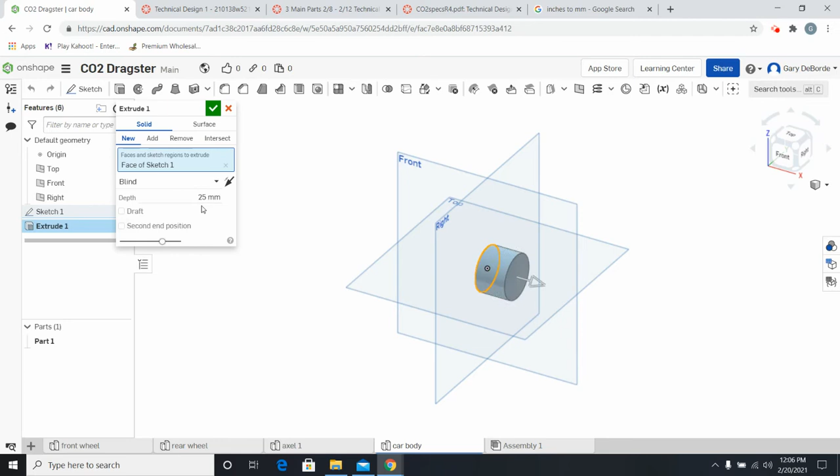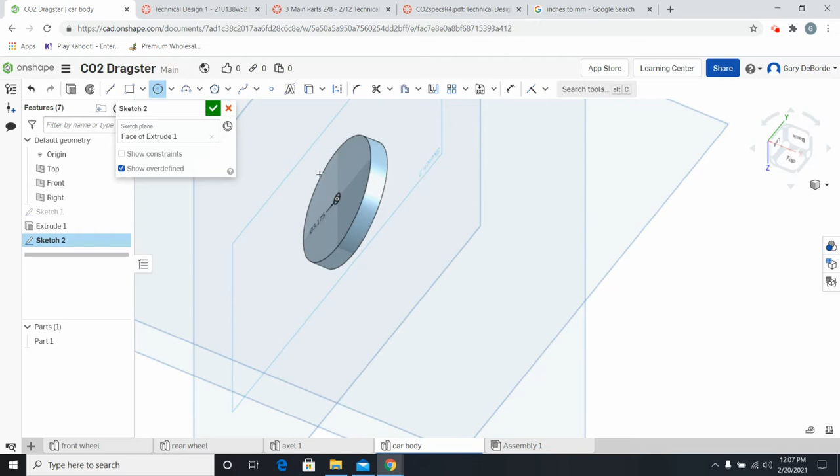Say okay to that. I am then going to select the surface of the wheel, and I'm going to select it on this other side, because I know it will be easier for me to connect to the car body that way later on. I'm going to make a new sketch, and I am going to place a circle in the very center of that, and I am going to make that 3.175 millimeters, which I know is the diameter of my axle because my axle is 1/8. I am going to say okay to that. And then I'm going to extrude this, say 3 millimeters, removing material into the hole and saying okay.

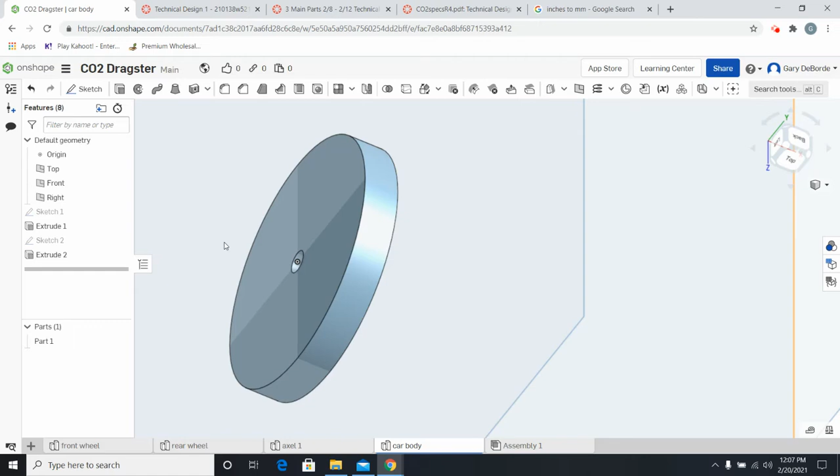Okay, this at this moment meets the specifications for the front wheel. Okay, so there we go. That's my wheel. It's in the front tab. I'm going to go ahead and roll with it. And then I am going to jump over and create my rear wheel.

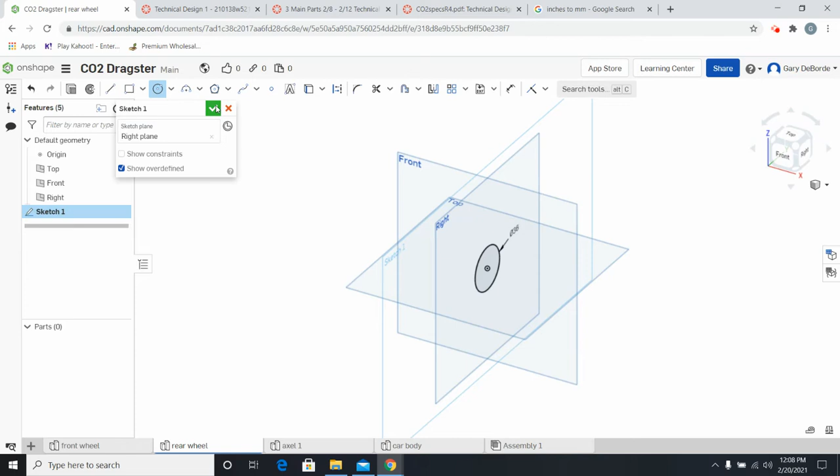For my rear wheel, I'm going to basically follow the same process. I'm going to create a new sketch on the right side, pardon me. I am going to make the diameter of my rear wheel 36 millimeters because I know that's within the specifications. I'm going to say okay to that. I am going to click on the surface of the wheel and extrude it the maximum distance that's allowed, which is 19 millimeters. And I'm going to say okay. Then I'm going to roll it over.

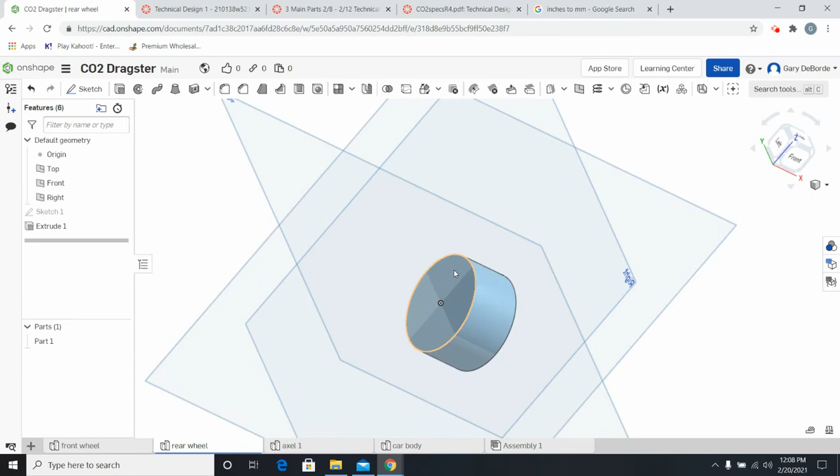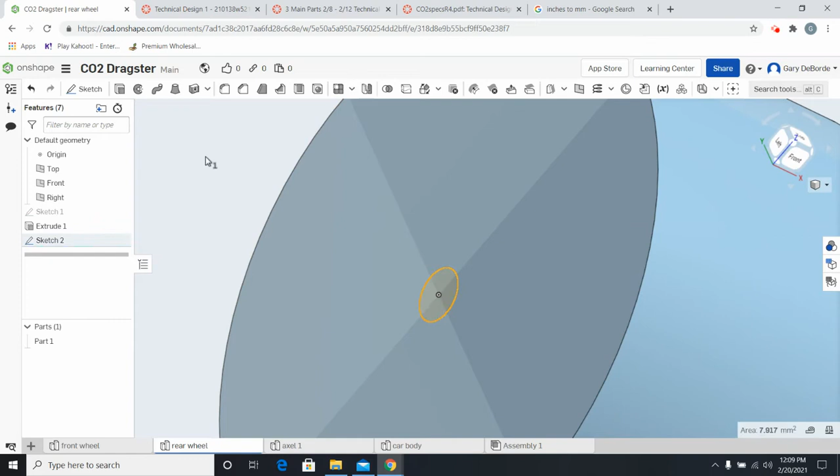Back here where my point of origin is, I'm going to create a new sketch. I am going to create a circle on that sketch, 3.175 millimeters, so that it's the size of the axle itself. Say okay. And then I am going to select that area and remove maybe 10 millimeters of the material and say okay. So now, for argument's sake, I have both a rear wheel and a front wheel for my dragster.

You know, that's all that's needed to do to at least have a drawing within the specifications. It may not be pretty, but it's correct. Now, as far as axles go, I know what the diameter is, but I do not know the length of my axles until I create the car body.

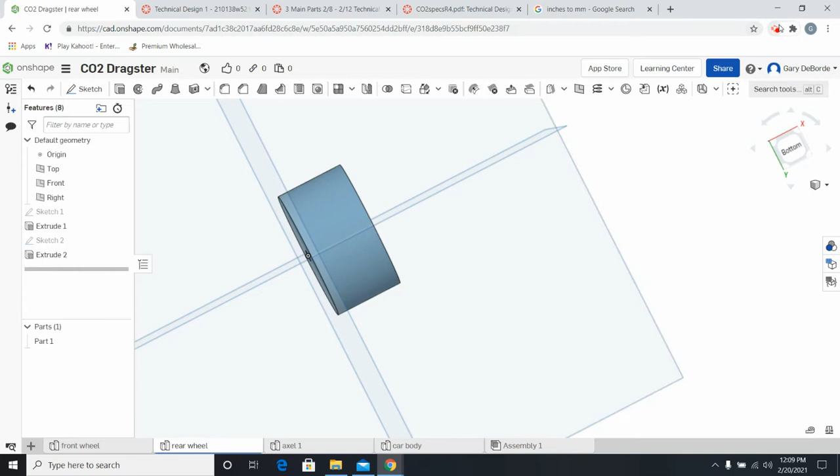So I'm going to go ahead and work on creating the car body, but I'm hoping I can find out how to pause this. Okay, well, maybe I can't pause it.

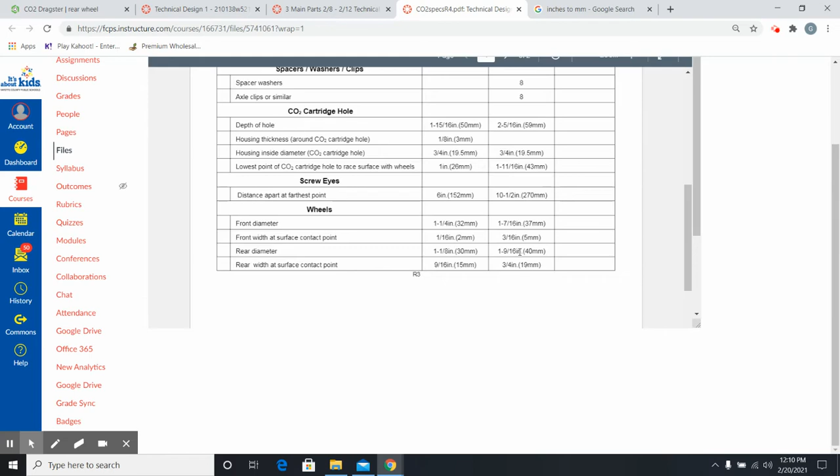So let's just jump over here real quick and make sure what measurements I'm allowed to use for the car body. I had written them down and seem to have misplaced them, so I'm going to jump up here and look at it real quick. The car body can be a maximum of 305 millimeters long. So I think I'll just go ahead and jump over here in car body.

Why is there a sketch in there? Rear wheel, front wheel. Okay, I unintentionally put my front wheel in the car body. So I'm going to just go ahead and rename this car body, and then jump over here and rename it front wheel, so I don't have to do a lot of switching around, and then get back in my car body part. That simple. Things happen to all of us.

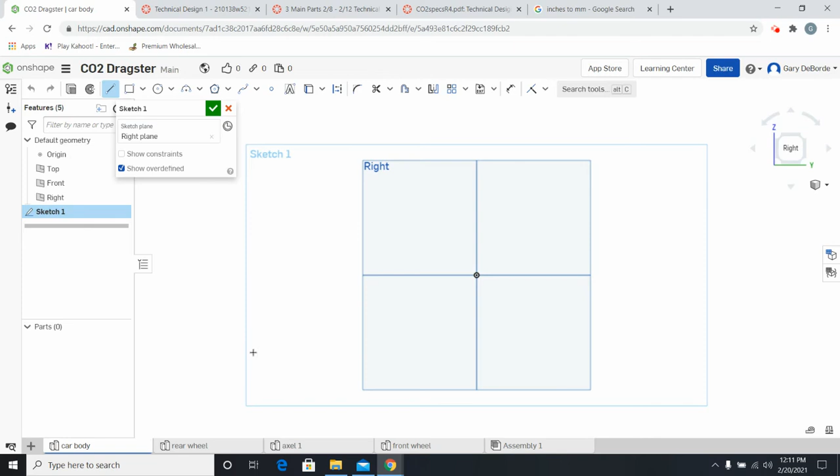I'm going to create a new sketch in the right plane. This time I'm going to turn it where I can see it a little bit better, since I'll be drawing things from the complete right view. It was 305 millimeters long, and I don't like to be on my point of origin for most things, especially if I'm trying to free draw. So I'm going to make that 305, and I am going to go back and look at my specs and see what I need to think about.

The dragster body height with wheels is a maximum of 3 inches, or 76 millimeters. So I have to think about that for a minute. 76 millimeters is the maximum height. The axle hole, because that's going to determine my wheel placement for overall height, should be at least 10 millimeters to the center point.

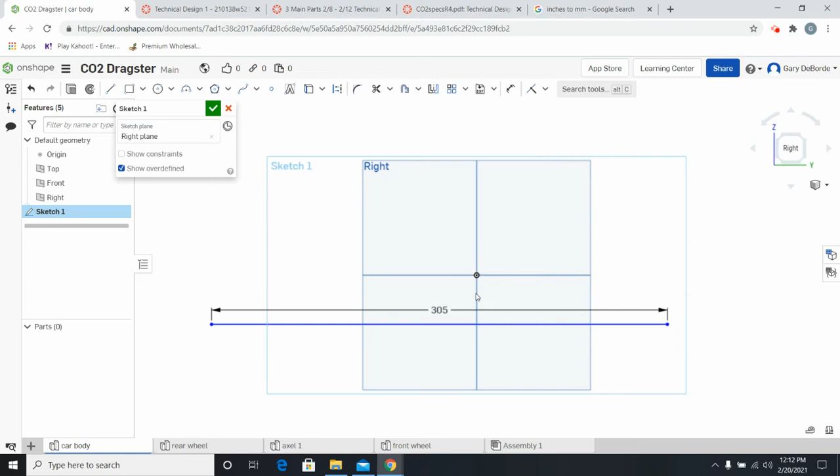I'm going to take a moment and think about it, and it can be up to 100 millimeters from the rear end, and up to 100 millimeters from the front. I don't really want to place them that far apart right now. So I'm going to jump over here, escape that line for a second, and draw some construction lines.

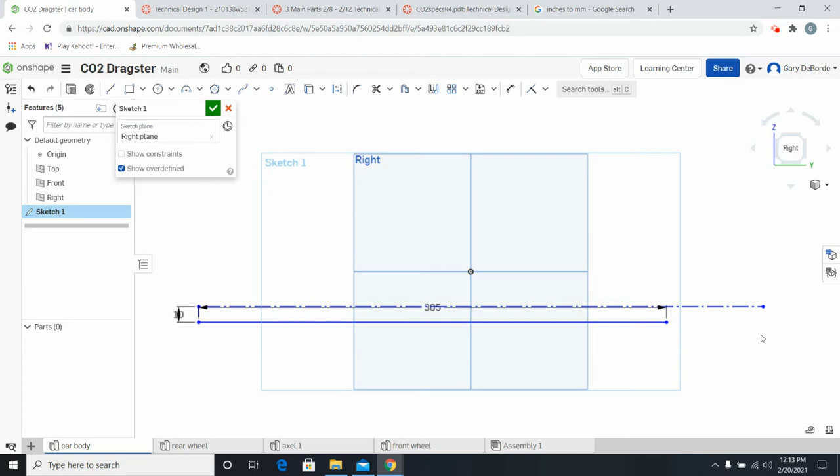I'm going to go here, go up, and make that 10 millimeters. And I'm just going to pull this over here nice and flat and hit escape. Then I know that is 10 millimeters up from the bottom of my vehicle, so that will be where the center point of my axle lives. I know I have a 36 millimeter diameter wheel, so I can measure from here down and know where the base of my wheel will set, which is important for the overall design.

But I kind of want to figure out how far I want to go with this, and I'm just going to go over 2-3 inches to do that. I'm going to use this calculator. Let's say I'm going to just go over 3 inches, 76 millimeters, basically. So I am going to keep with my construction line for a minute, and come down here, just pull a random. It's not letting me, it's not drawing a line.

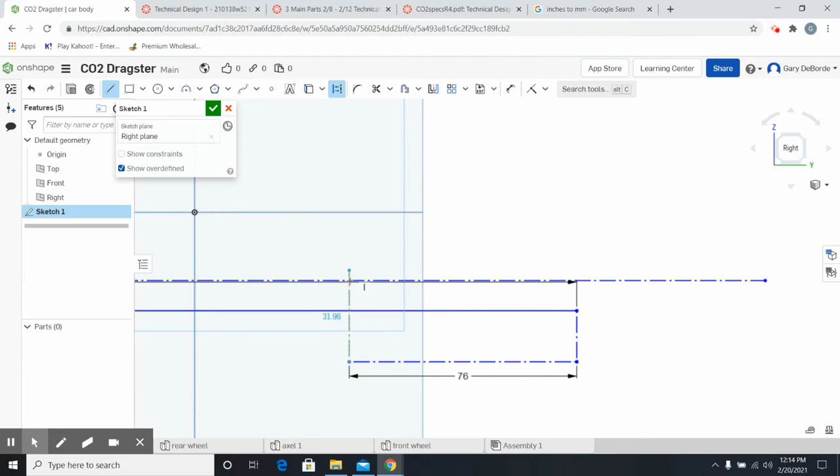So I'm going to pull a random line length down here, pop over here and make this 76, and I know without a shadow of a doubt I'm in the right place. Then I'm going to go up and touch this line and say okay. So at this moment, I know that this point will be the center of my hole that goes through the rear part of the body of my car for putting the wheel in place.

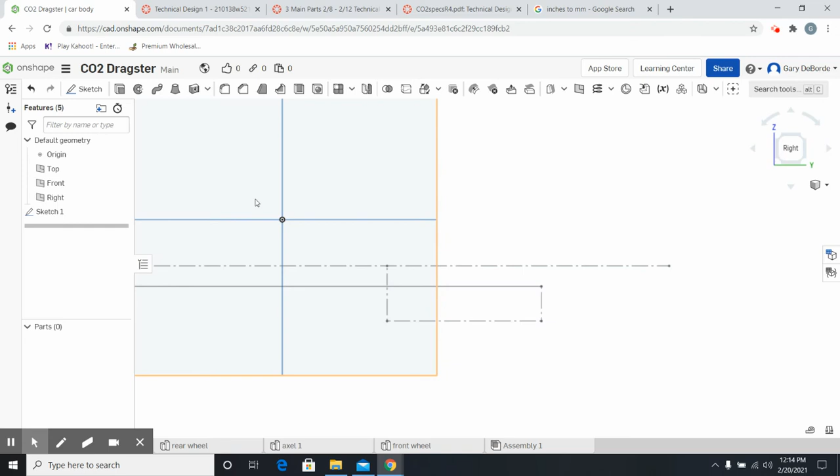And I know that hole needs to be just a little bit bigger than the 1/8 inch of the axle, or the 3.175 millimeter diameter of the axle. So I am going to make it 3/16, which in millimeters is 4.7625. So I'm going to slide in here with the circle tool and put a hole that is 4.7625.

And that's where my axle will live that supports my tire. Now back to that other thing. I know that the center point of my axle determines the overall point at which the surface of my rear wheel will touch the table. And I know that my rear wheel was 18 millimeters. So with that said, hopefully I've got enough constraints in place. I'm going to go ahead and pull a measurement here and just call it 18.

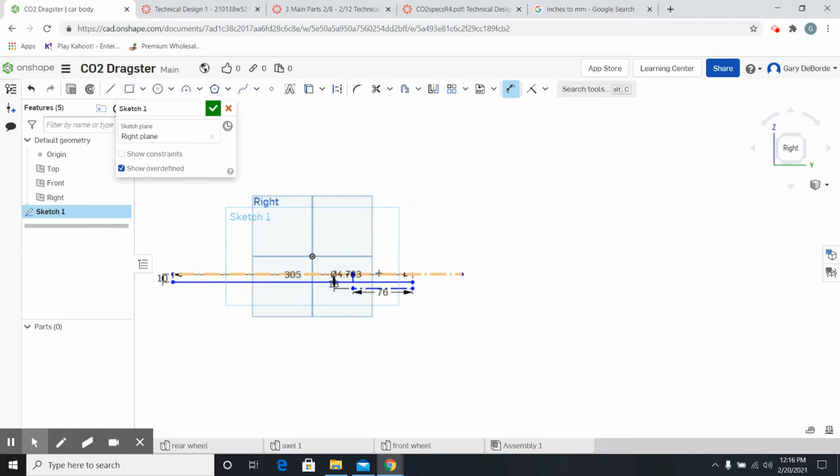And sure enough, since I had it constrained at the front, since I had this set at 10 here, that line didn't move, only this one did. Now that is the very bottom of my wheel. So how does that help me? That helps me because my overall height of my body can only be 3 inches or 76 millimeters. With that in mind, I can go from here and I can take this and maybe just slide it back a little bit. No, it wouldn't let me.

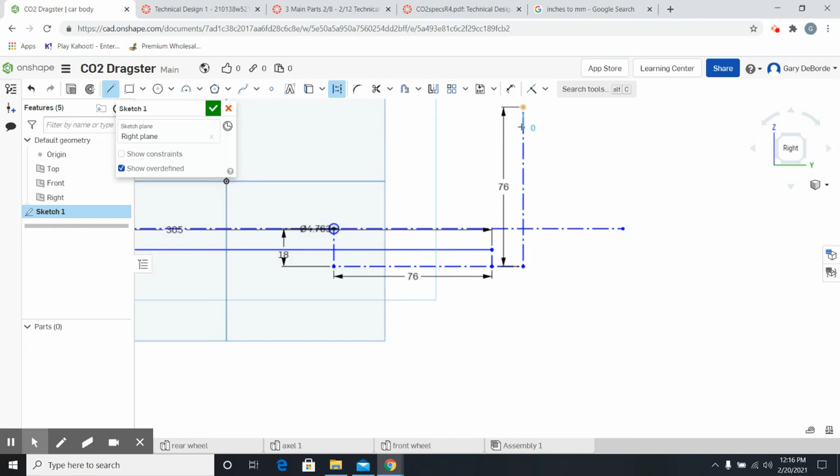But I can go from this with a construction line. I can go from this bottom point where the wheel touches the surface, pull a little bit of a line over, go up here and click this and change it to 76. Now I know for a fact that's the tallest my car can be. That's the point where when I start adding lines in, I cannot go above that.

So I'm going to go ahead and complete part of my body. I'm going to click on the object line here, go up and get this straight across, and you notice it's only 68. And then I'm going to come down here and I'm going to pull up a little bit just to give me some sort of an angular look to it. And then I am going to pull down to here.

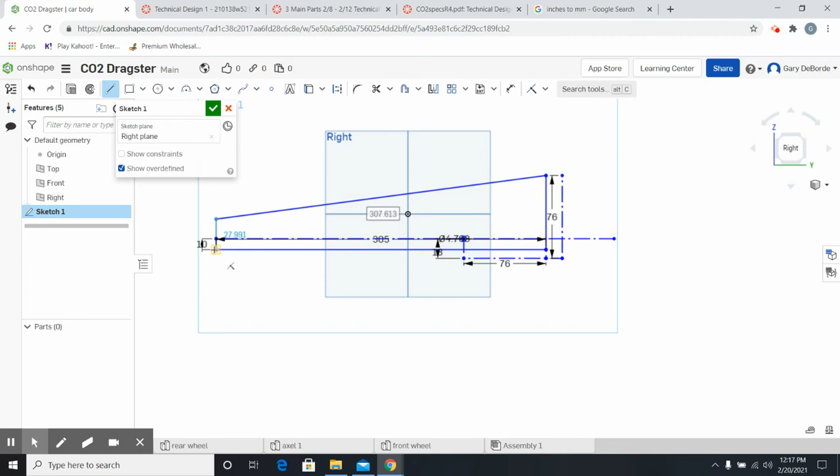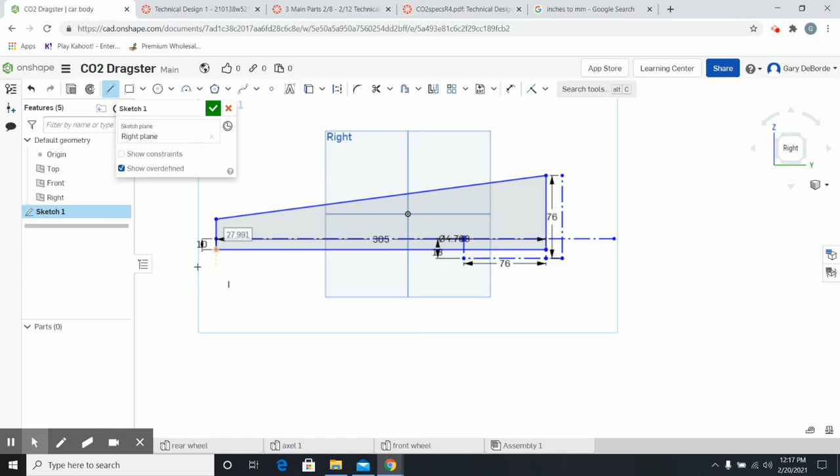Now, I know the front of that wood, because everybody asks me, well, how tall is that? It's a 1/2 inch. So what's a 1/2 inch in millimeters? I'm going to go back here and find it. 12.7. I'm going to go here, and just to make sure that I'm well within everything, I'm going to make this 12. So now, if you can forego looking at the construction lines, you see this shaded in area. That is the profile of my car.

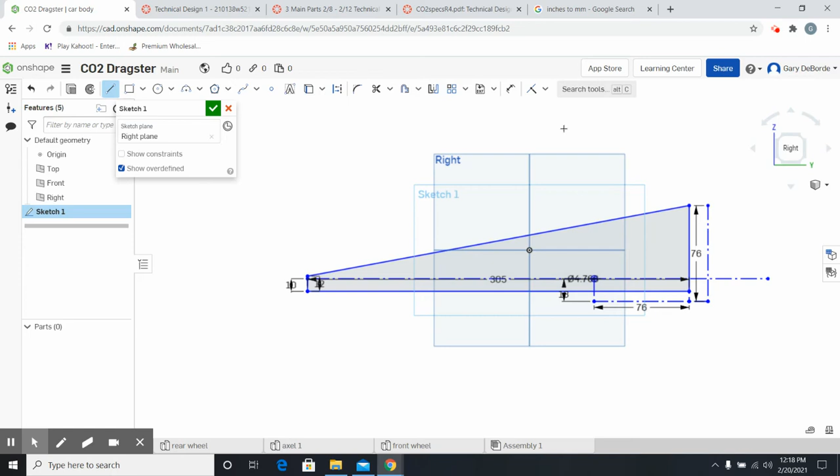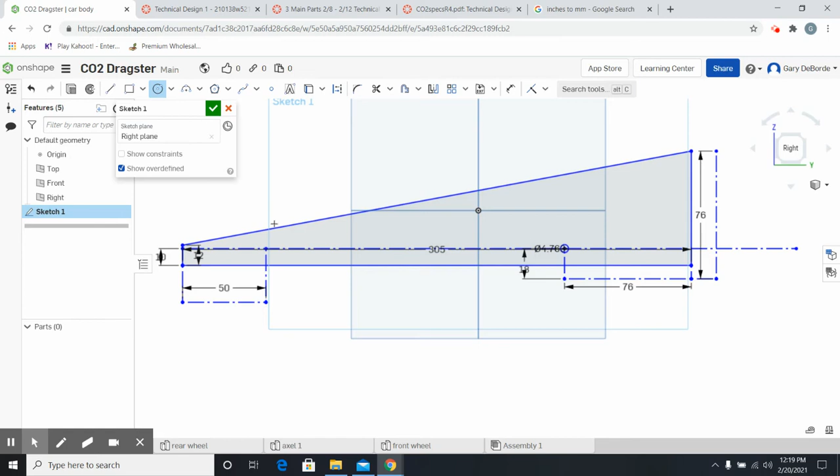So I'm going to go back to the body of my car, take a construction line. I'm going to go here, just down a little bit, and just over a little bit. Maybe I'll just go roughly 2 inches. And 2 inches are, let's see, roughly 50 millimeters. And I'm going to type in 50, make sure that's there. Then I'm going to take this straight up and attach it to that line. Hit escape.

And then I'm going to go ahead and put the hole, which was 4.7625, into the car body so that I know my front wheel lives there. And I know that because I drew my wheels the same height, and I've already used this construction line to make sure that I had the proper allowance from the bottom of the car. And the only thing I don't know for sure is, do I have at least 4.5 inches from here to here? I can go ahead and check that, because if I don't, then I can't use this.

So I'm going to change this to 4.5. So I need at least 114.3. I am going to go ahead and take a quick measurement between these two just to make sure that I have that. And I have 179, so no problems there. So right now, everything about my car is within specifications. I am not over 3 inches tall.

I have my wheels placed at locations that will allow me to meet the criteria of the design as provided by this sheet. I have 2 axle holes. My axle holes are not above 10 millimeters to the center. My rear axle hole is within the 4-inch max. My front axle hole is within the 4-inch max, and my wheelbase is within the 105 to 270 millimeters. So now I have that.

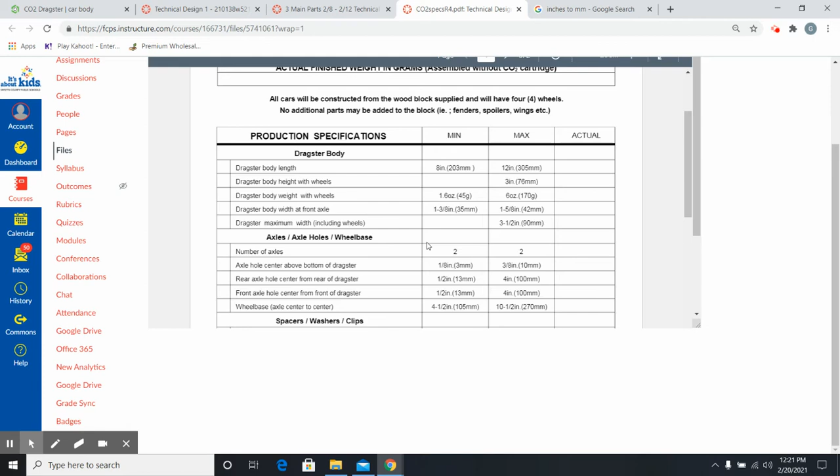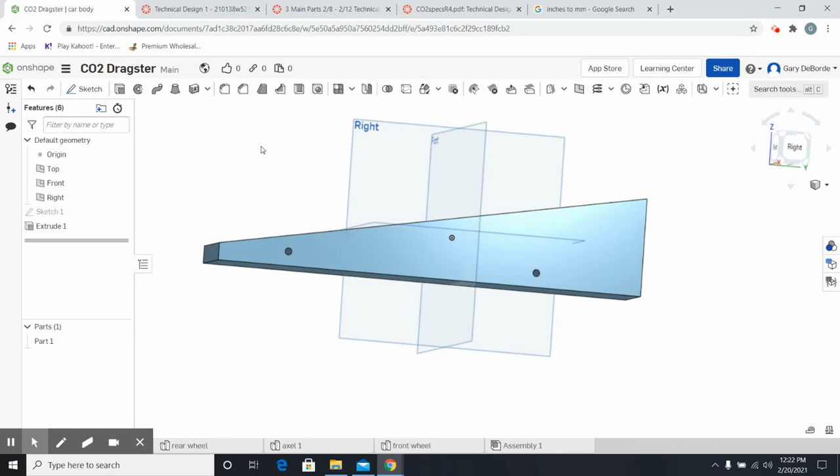So I'm going to go back to the Dragster body, click that I have it drawn. I'm going to extrude this sketch, and I said 42 was max, so I'm going to go ahead and make it 42. And now if you look at this, this body, for argument's sake, it's not pretty, but it does meet the specifications of the drawing. It does not necessarily meet the weight requirements, and we'll have to check that, but it does meet the specs

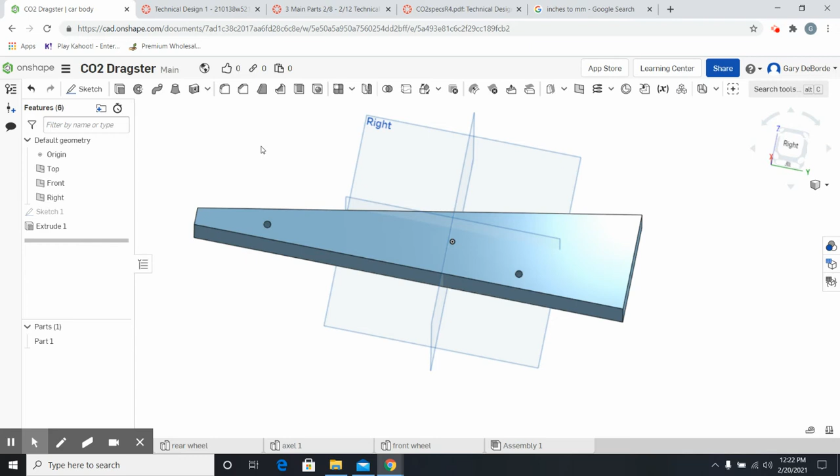of the drawing. So now the only thing I'm missing is my motor, the hole for my CO2 cartridge. So I'm going to go back to this sketch and look at this for a minute, pull it in front of me and see what I have to know. And I have to know things by looking at the sheet. So I'm going to go back here and look at the sheet. So I'm going to click here and kind of move this along a little bit.

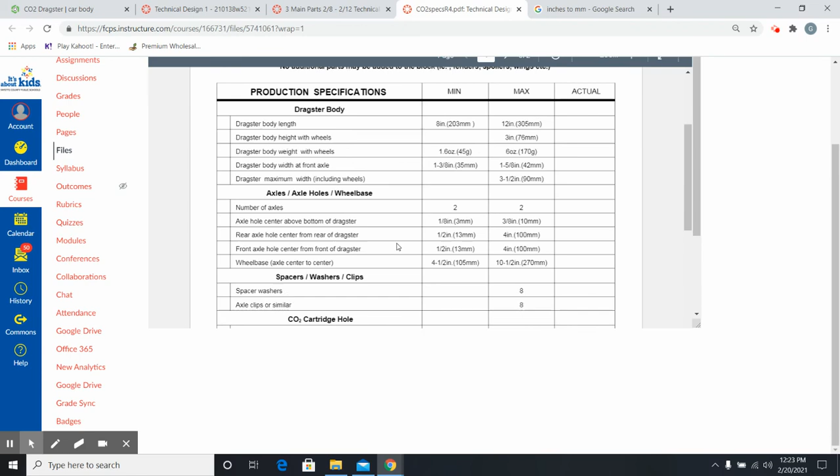The lowest point right down here of the CO2 cartridge to the surface, so that's at the bottom of the wheel, should be 26 to 43 millimeters. Okay, so I'm going to go ahead and make it just a little bit over 26. That way, if there's any play in my wheels or whatever, I'm safe. So I think I'm going to make it 28 millimeters to the lowest point.

I also need to know the diameter of that hole. The housing inside diameter is 19.5. So I'm going to write that down. So I want to be up 30 millimeters to my hole, and I want to be 19.5 diameter on my hole. So I kind of jot that down because I don't want to have to keep looking back and forth.

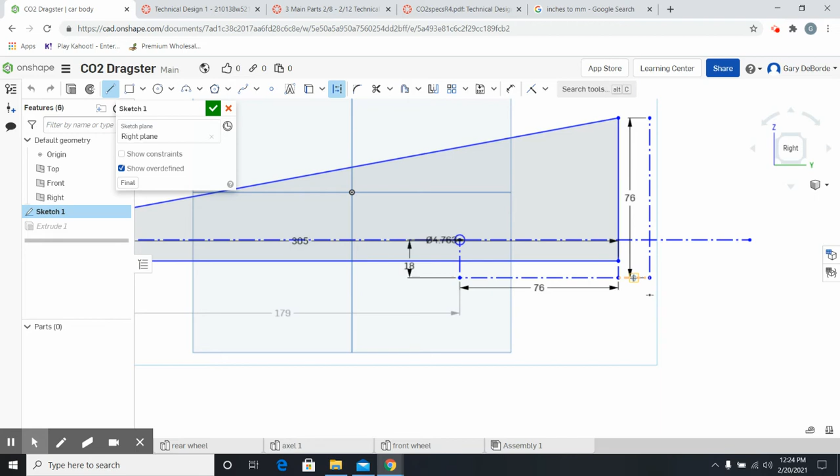And I'm going to grab my car body, and what I'm going to do is another construction line just so I can get some measurements. Because see, the wheels aren't on here, so I need something to work with. So I'm going to go over here and grab this center point, and I'm going to go up 30 millimeters and hit enter.

And then I'm going to pull it through the body, just because what I'm really looking for is, if I go to drill this hole, how far is it from here to here, the bottom of my hole, not from the road, because then I'd have to have all my car built. I'd have to measure everything, mark it all off, take it apart, drill the hole, and I don't want to be there.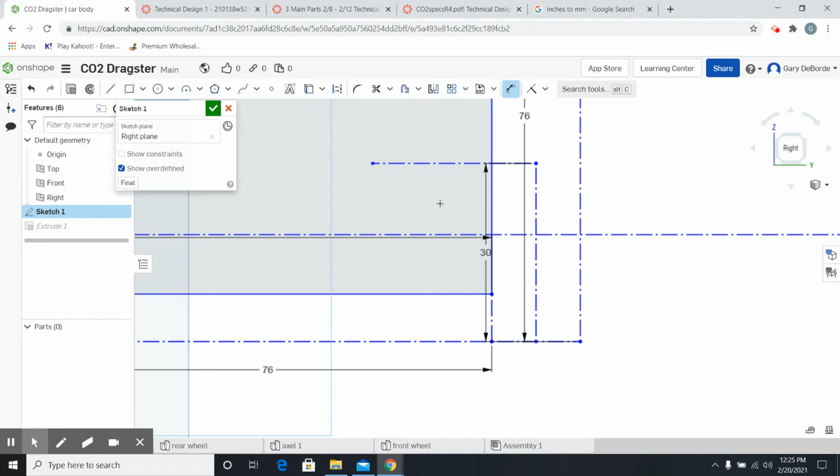So I'm going to measure from here to here, and I'm going to discover that I need to be 22 millimeters up on the back side of this car to be at the bottom of my CO2 cartridge hole. I can just hit enter, I can hit escape, and I can say, okay, I know that. I'm going to write that down. So I need to go up 22 millimeters on the back and drill a hole in this wood.

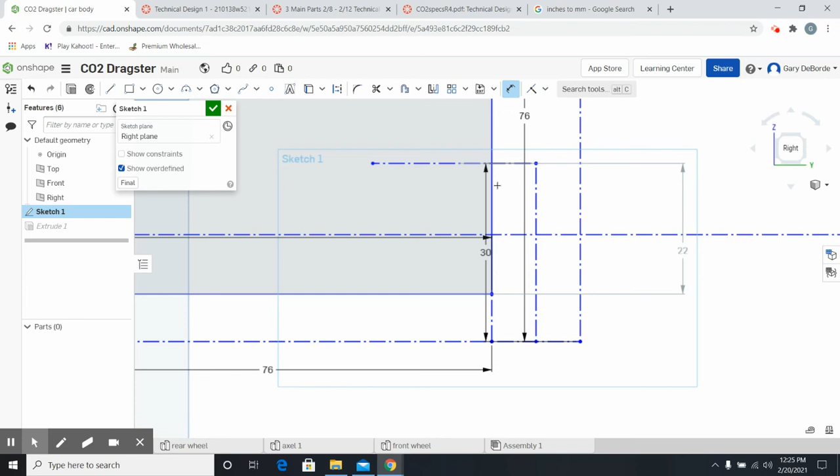So to do that, I'm going to say okay to my sketch and get back here. I'm going to spin my car around to this side and create a new sketch, because this is where I'm going to drill my hole. And that's on this back side. So I'm going to pull it right to me. I'm going to use a construction line again, and I am going to find my center point right here, because I want my hole to be in the center.

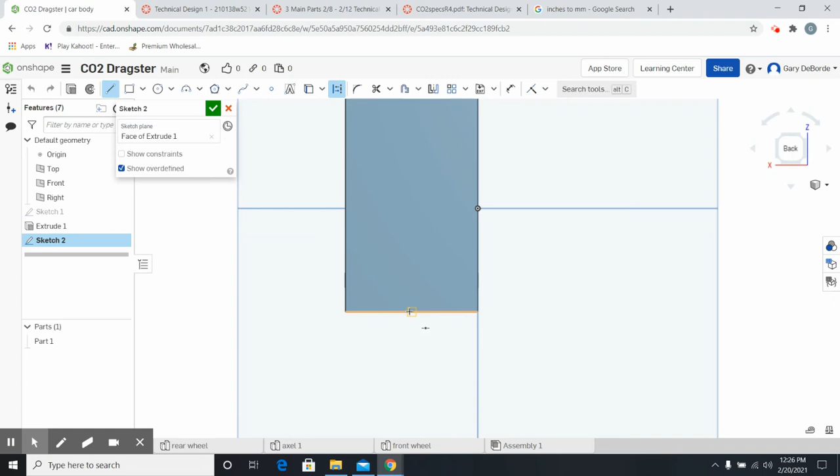I'm going to click this, I'm going to pull it up, and I am going to type in 22, and that is enter. And then I'm going to pull it up and put the dimension of my hole right there. So that's where my hole's going to live. It's going to live on this center point. So I'm going to escape there.

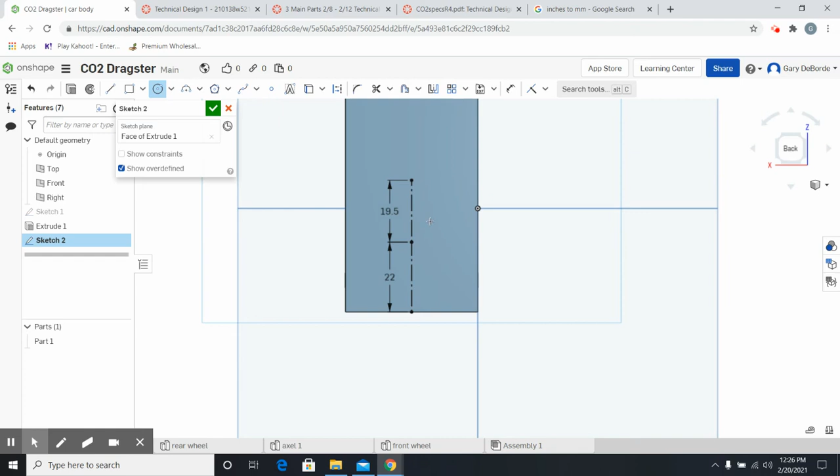I'm going to take me a circle. I am going to find the midpoint of this line by touching the square. I'm going to pull it down and touch the square. And now I have exactly where my motor must live in relationship to my drawing. So it goes right there.

And I do need to jump back here because I forgot to write one thing down. The depth, somewhere between 50 and 59 millimeters. So I'm going to go ahead and put myself somewhere close to the middle at 55. So I'm going to go back to my car body.

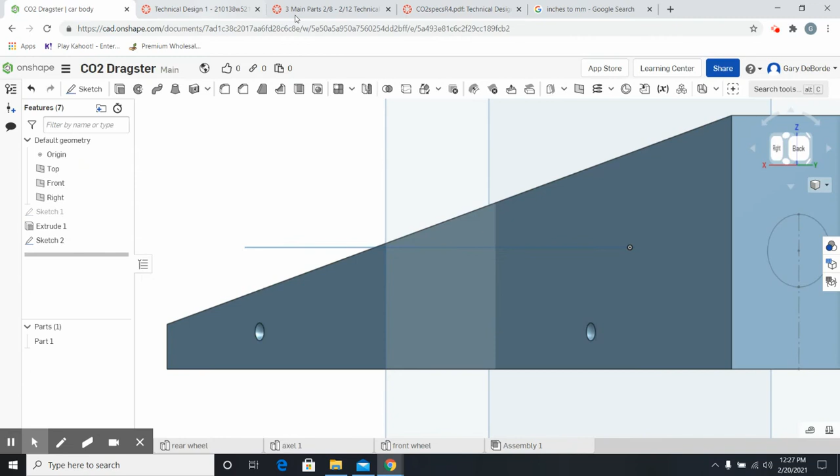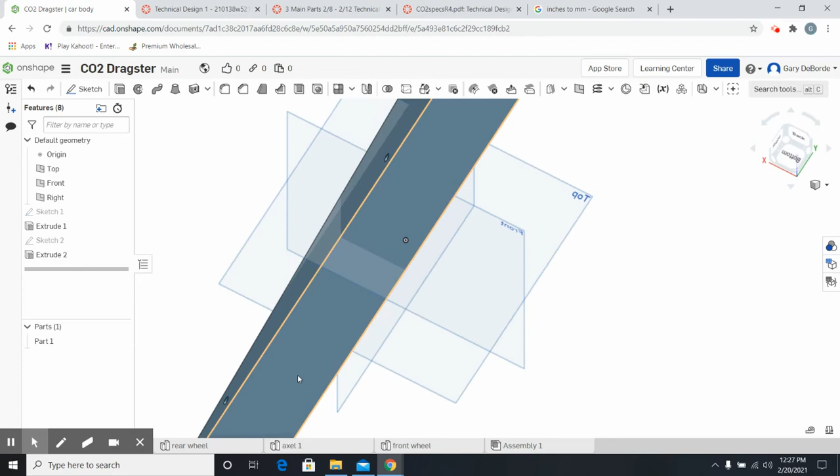I'm going to select this circle for extrusion. I'm going to extrude it. Naturally, it tries to add, but I want to remove. And I want to remove 55 millimeters of material and say, okay, now I have a legitimate car body.

Now, this is within specifications, except, and I do add except very, very cautiously, I have not weighed this, so I don't know. If it's too heavy, then I can't use it. But as far as meeting all the specifications, I definitely can use it. Okay. It is definitely within those measurements.

All right. So now I have the front wheel, I have the rear wheel, and I just need to try to figure out how long my axles will be. And since I've made everything the same width, my axles will be similar, but not the same, most likely, because if you remember right, when you look at the rear wheel, this extrusion was 10 millimeters deep. So I have 10 millimeters. I'm going to keep that and write it down. So the axle will have to be 20 millimeters longer just to fit inside both wheels. So I hope that makes sense to you. So I have plus 20 right there.

And then I'm going to go pop over here and look at my front wheel. And I want to see that second extrusion. I don't remember what it was. It's 3. So I need 6 there for the axle to fit inside those wheels. I'm going to jump back over to my car body. And the extrusion was 42 millimeters.

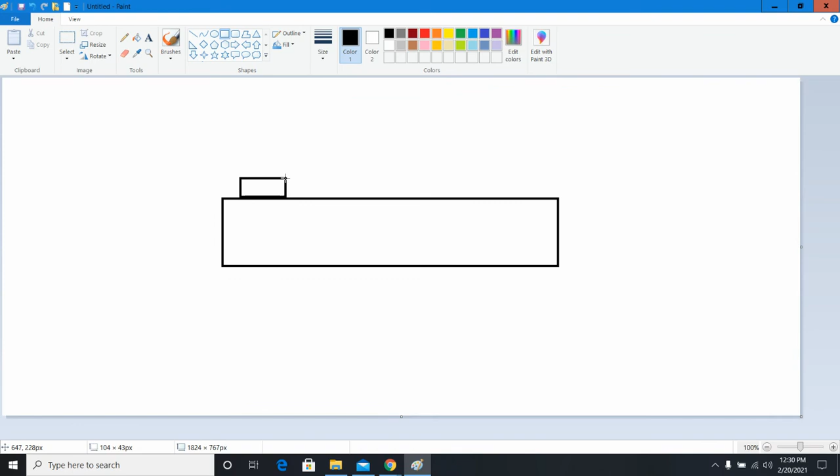So if I put the wheels, and here's the way I want you thinking. If I put the wheels tight against the body right now to where they're touching, which would be bad, but if I put them touching, then it would look a lot like this right here. And I'm going to jump out here and grab Paint real quick and give you a visual of what's going on inside of my head. And we're going to look at the top view. So let's say this is the top view of my dragster. And let's say if I put my rear wheel here and a rear wheel here, and then I put my front wheels here. This is just a quick little sketch, and it's not perfect, but it is what it is.

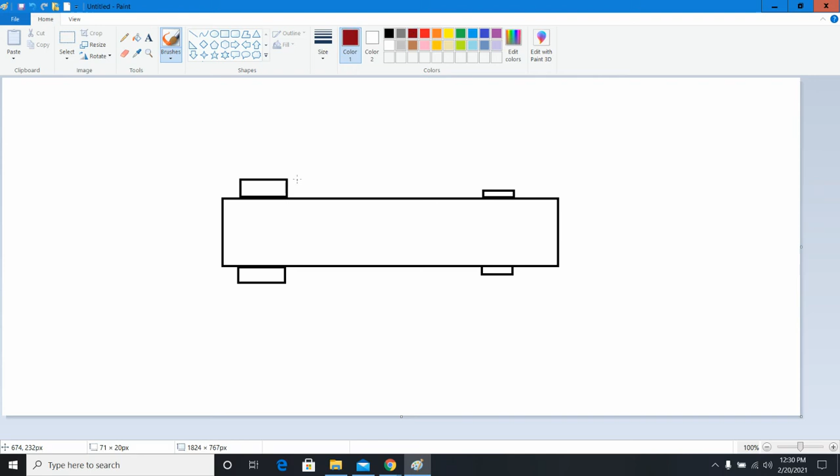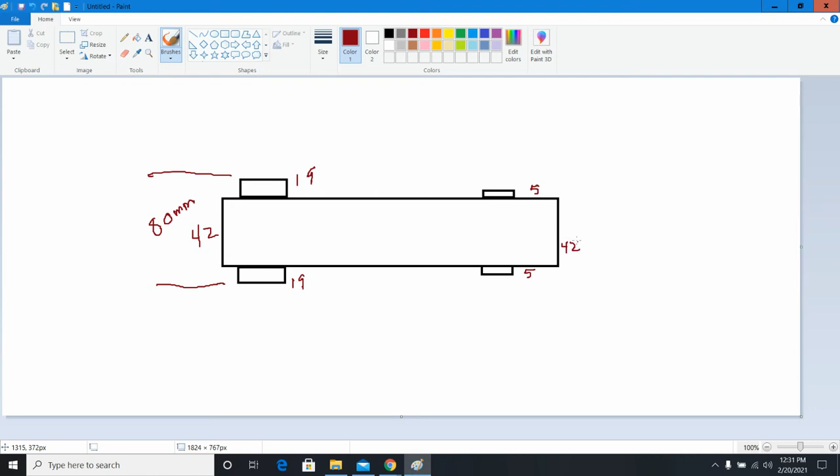So if I place these wheels tight against the body of the car, this one is 19, this one is 19, and this was 42. So this would be 62, 82 minus 2. From here to here would be 80 millimeters. All right. The wheels for the front were 5 and 5 and 42. So if I measured from there to there, I would have 52 millimeters wide at the front. Obviously, I need a little space between these. And I do have to account for how deep the axle sets into each wheel.

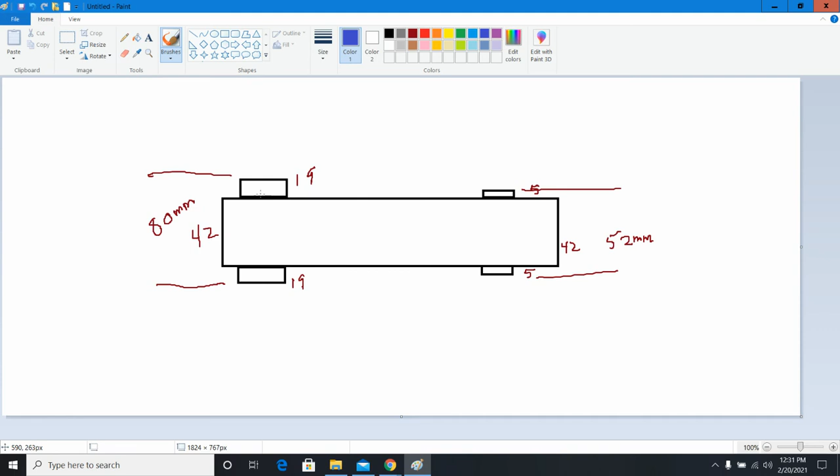So if you remember right, I said that the axle, and I'm going to blow this up a little bit here, I said that the axle would rest 10 millimeters up inside this. So the axle goes up inside this wheel 10 millimeters. So 10 plus 10 down here plus the width of the car would be 62 with no space. Let's say I want to give it at least 3 millimeters of space. So I add 3 to each side, or plus 6.

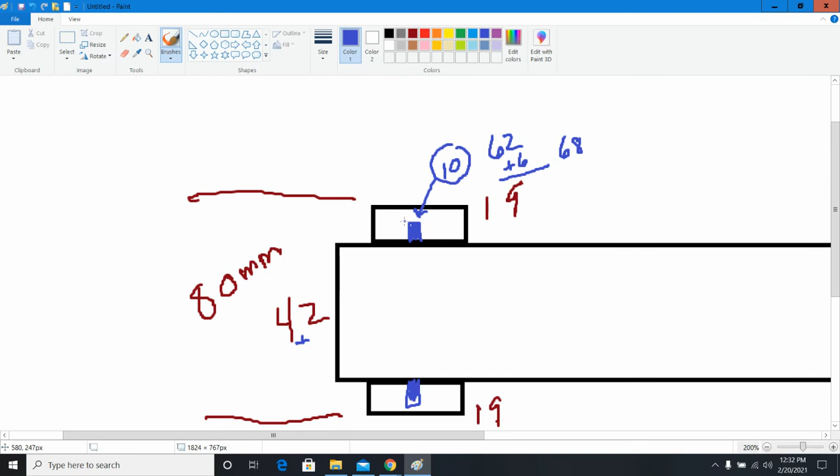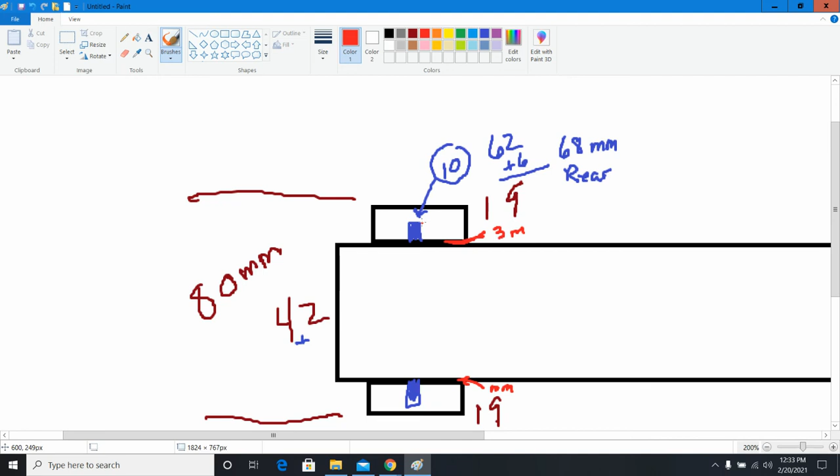That means 68. So that means if I make my axle 68 millimeters in length for my rear axle, I will have a space here of 3 millimeters on each side. So 3 millimeters on each side. I have that gap right there. And my total at that point will be different, but you know what I mean? So now it'll be 22 plus 22 plus 42. So that is 44 plus 42, which is 86.

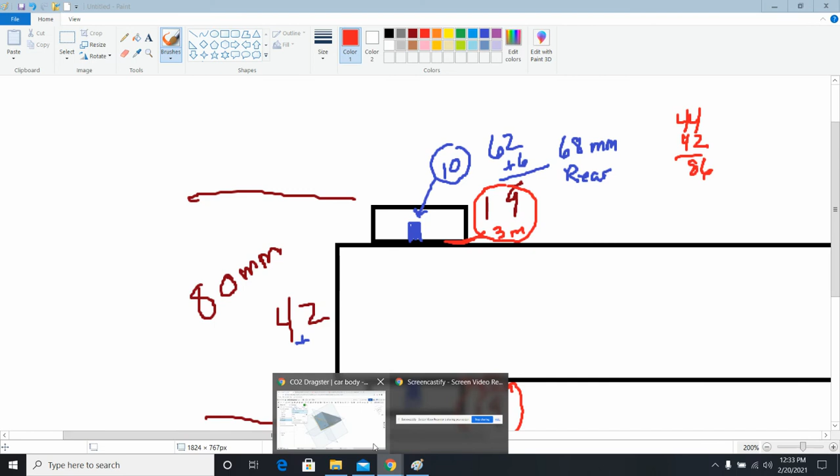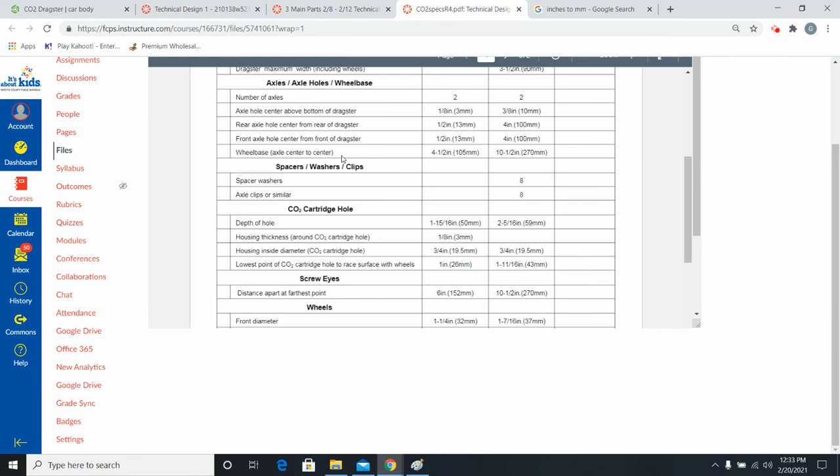And if I pop back over here, hopefully that was still recording. I couldn't tell. But if I pop back over here and I look at my specifications, you remember, right? My maximum width with wheels could be 3.5 inches or 90 millimeters. If we look back here, I am at 86, so I'm okay. So remember, I need a 68 millimeter axle now for the rear.

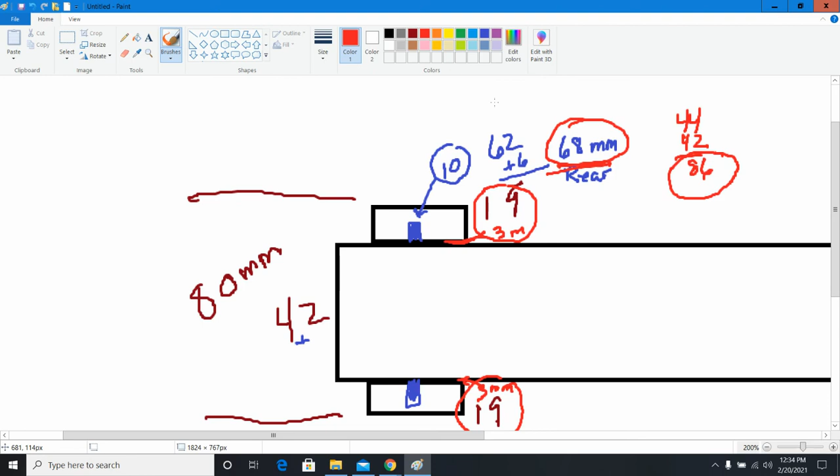So I'm gonna go ahead and jump over and draw that piece. And I'm gonna jump in here to the axle. And since I know that my axle is going to be going through the car this way, I'm going to go ahead and draw it in the right side view as well. So I'm going to go over here and I'm going to create a new sketch.

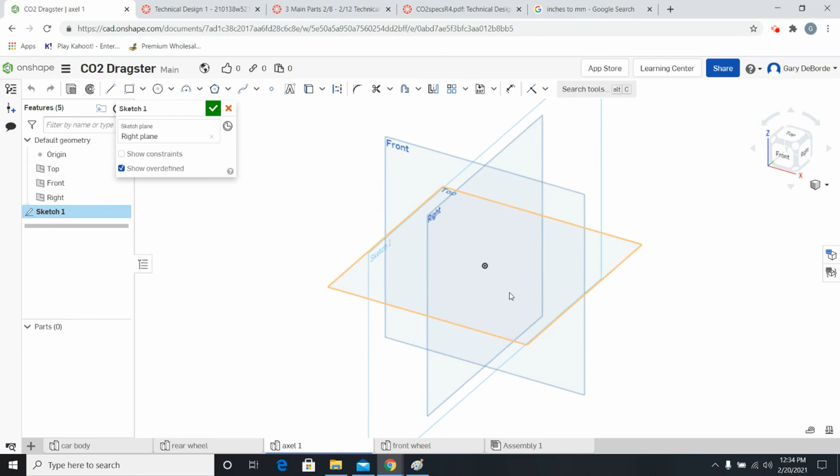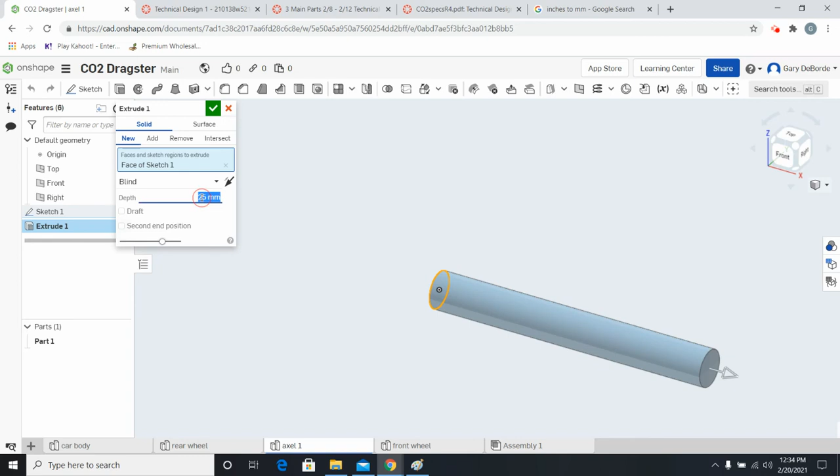The width of the axle is 3.175, or 1/8 of an inch, but 3.175 millimeters. So 3.175, enter. Blow this up so I can see it. I'm going to say okay. And I am going to extrude this 68 millimeters. Say okay. There you go.

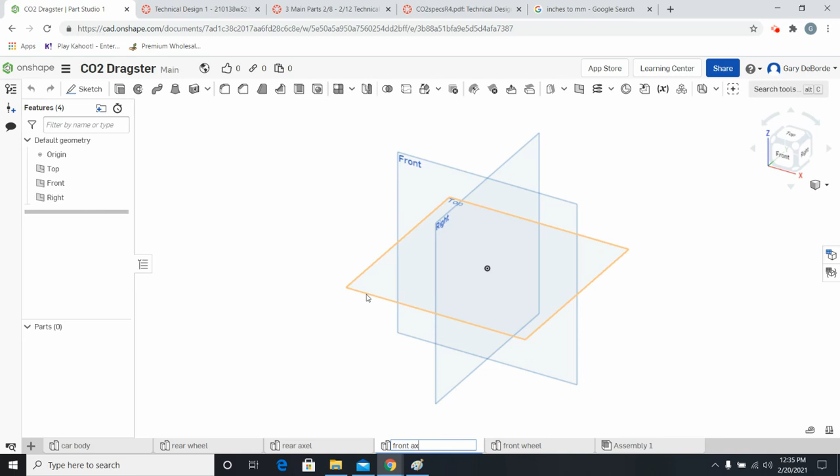That's my rear axle. Now, just by looking at the drawing, I know for a fact my front one's going to be a little bit different. So I'm going to go ahead and rename this rear axle and hit enter. And then I'm going to create another part studio because I need another part, and I'm going to name this one front axle. I know it's going to be different.

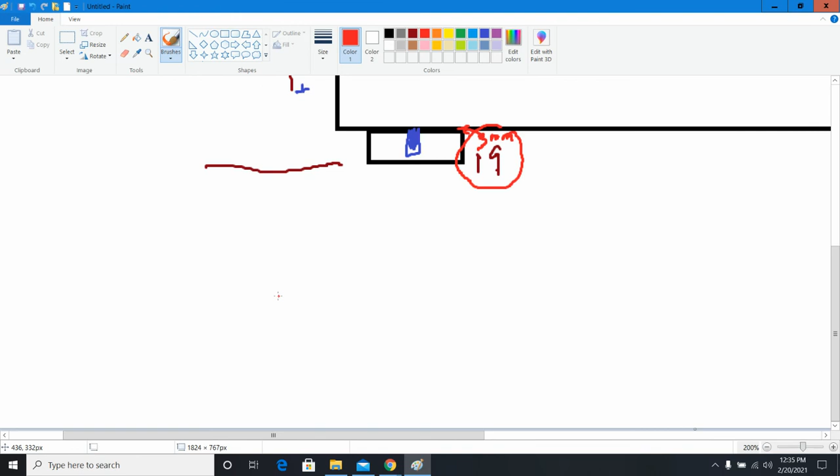And I'm going to jump back over to my drawing and try to figure out what that front axle looks like. So I know that it can be up to 90 millimeters wide, but we don't even need to come close to that. So I want to place that same 3 millimeters of space between these wheels. So right here, there's going to end up being 3 millimeters of space between each one. So, nice little place so the wheels don't rub the body. Put that there.

And I also know that these axles live 3 millimeters deep inside here. They slip up into the wheel by 3 millimeters. So from this 3 plus this 3 plus 42 would be 48. That's if I have it tight against it. 52 to the outside, but 48 from the axle length. Now we're just looking at overall axle length, right? If the axle's passing through here, same way we did with the rear wheel.

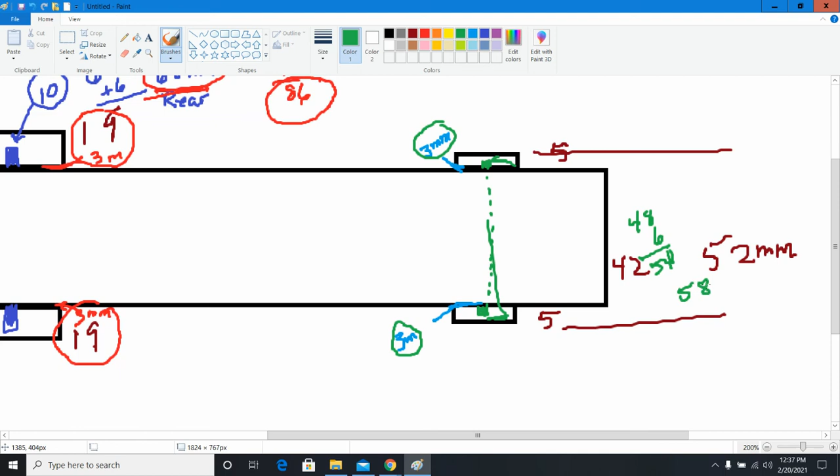So I need to add 3 plus 3, or 6 millimeters, to this 48 if I want the wheels to stick out past the car body 3 millimeters on each side. So 54, and then I have 4 left over on the overall thickness of the wheels. That's going to end up being 58 total. No worries. That's well within my 90. So 54 is more than perfect for my axle.

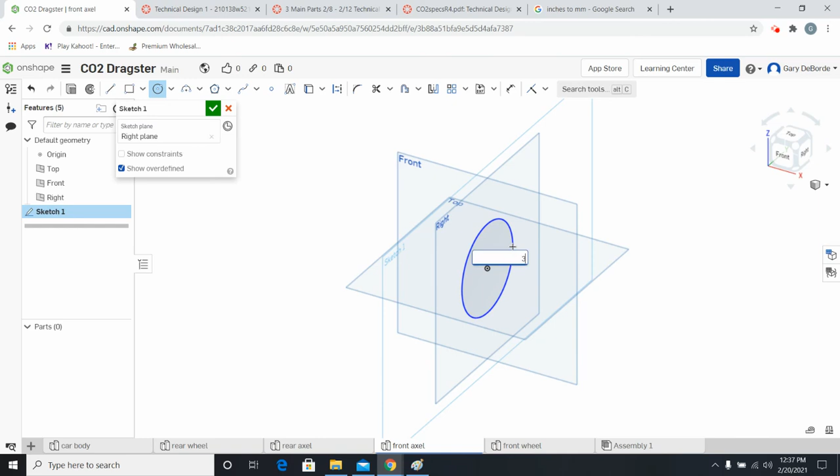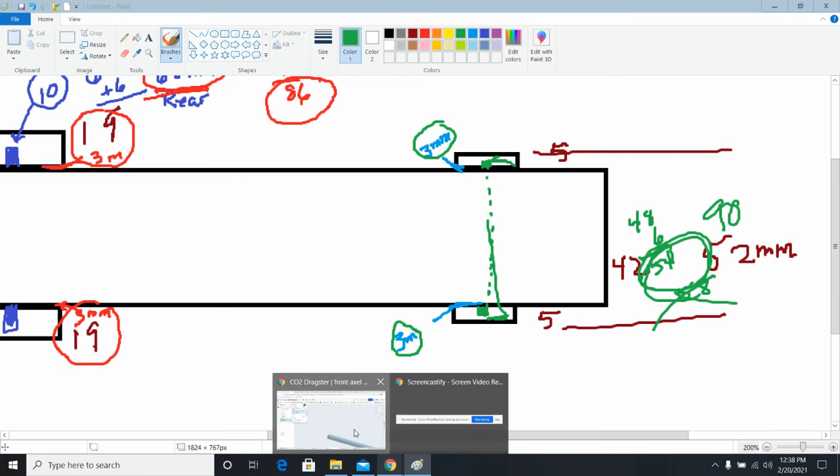So what I'm going to do is jump back over here, another quick draw, jump in the right, make a sketch, put a circle in the middle, pull it out, 3.175, zoom in on it so I can see it a lot easier, say okay to my sketch, and click here and extrude this. And I believe I said 58. If I didn't, I'll go back and change it. Let me go quickly look. No, 54. That's why we write things down, because it's easy to forget. I'm going to change that to 54. And I have my axle completely built.

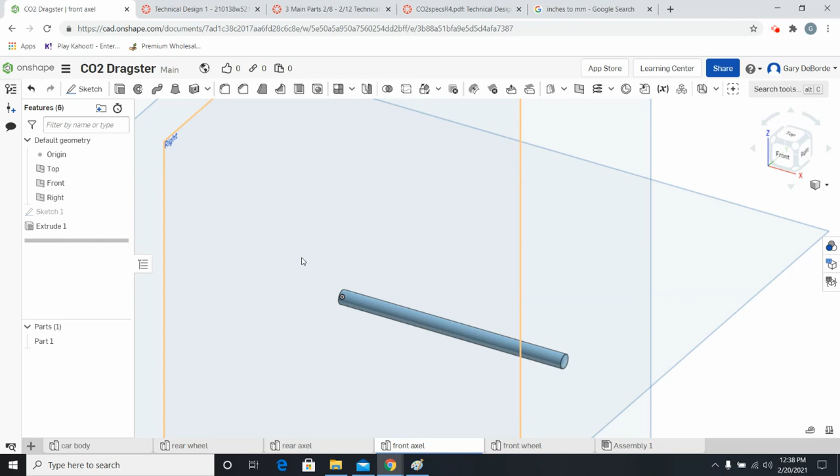So at this point, for argument's sake, I have drawn a CO2 Dragster. I have drawn one that meets all of the specifications, meets all of the requirements. The only thing I do not know is whether or not my car meets the weight requirements. So to do that, and I showed this to you in a video the other day, let's just go look. Okay, so first I'm going to jump out here and start measuring some stuff, and then I'm going to total those things up. I'm going to measure my rear wheel first.

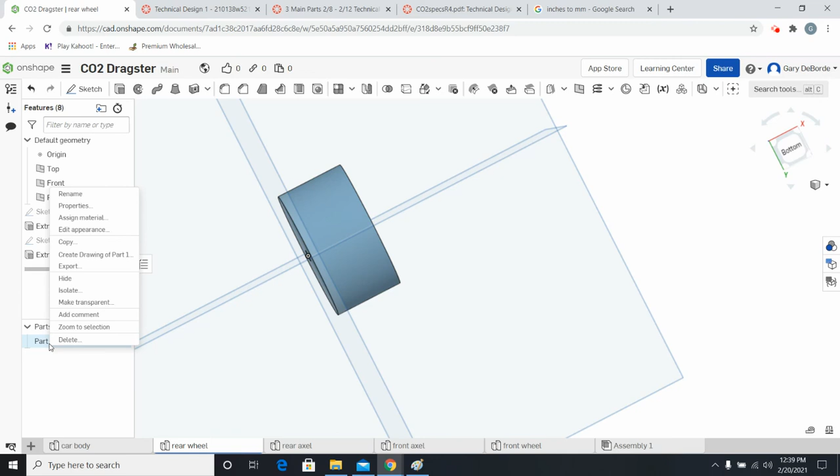And the way I do this is I first have to assign properties to that wheel, have to tell the computer what the wheel is being made from. Because if this was being made from feathers, it would weigh a lot less than if it was being made from stone. So I have to click on my part, right click it, and it says assign material. So I'm going to assign material, and I am going to find PLA, because that's what I told you guys these were being made out of. Thankfully it's all alphabetic and not by density. So I've assigned PLA as the density of my wheel.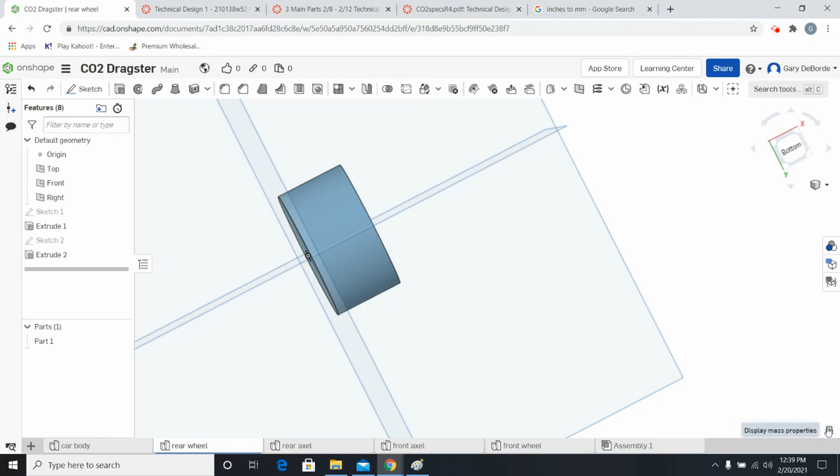Now, if I click on my scales and I click on the part, it will tell you that it weighs 0.053 pounds. So what does that look like for a math equation? How do I apply my math skills? I have two of these, and it weighs 0.053 pounds. So, easiest way is just to multiply 0.053 by 2. I did it so fast, I know I did it wrong. So it weighs 0.106 pounds for 2. Now I'm going to write that down, and I need to convert this to something.

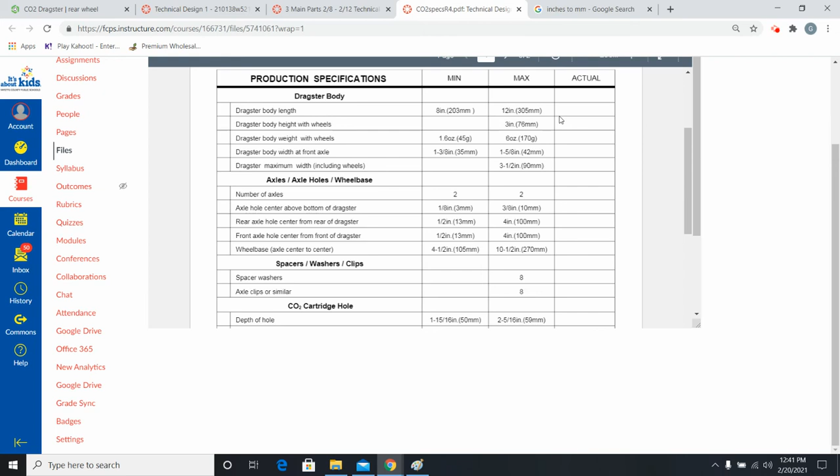So what was the car weighed in? I have to jump over here and look. Somewhere it said maximum weight, right here. Dragster body weight with wheels, minimum 45, maximum of 170. So I'm going to write those two things down, 45-170, just to keep things fresh in my head, and stick that little sticky note over there. And then, since it's being weighed in grams, what I need to know is how do I convert pounds, and I'm not going to do all that crazy math, to grams?

Sure enough, there's this wonderful calculator right there. So I know my two wheels weigh 0.106 for 2. So those two wheels together weigh 48.08079 grams. Wow, that's a lot. I know that's a lot, especially when I start thinking I'm already over my minimum weight for my vehicle just with my two rear wheels. But who knows? Maybe I'll still fall within the right confines.

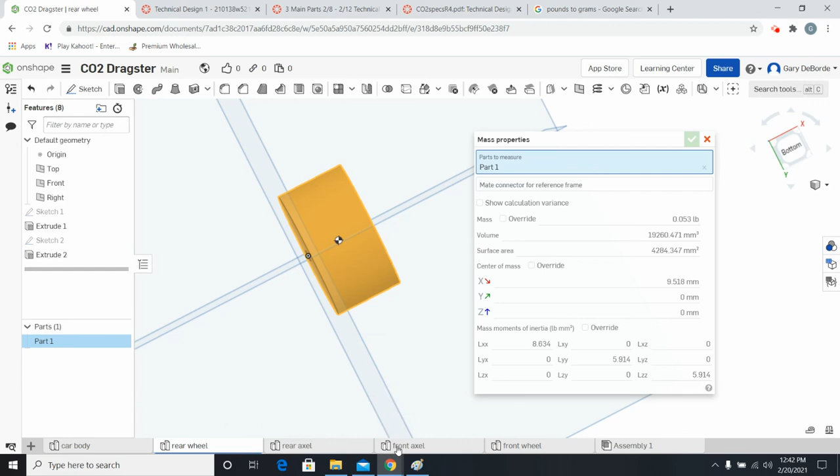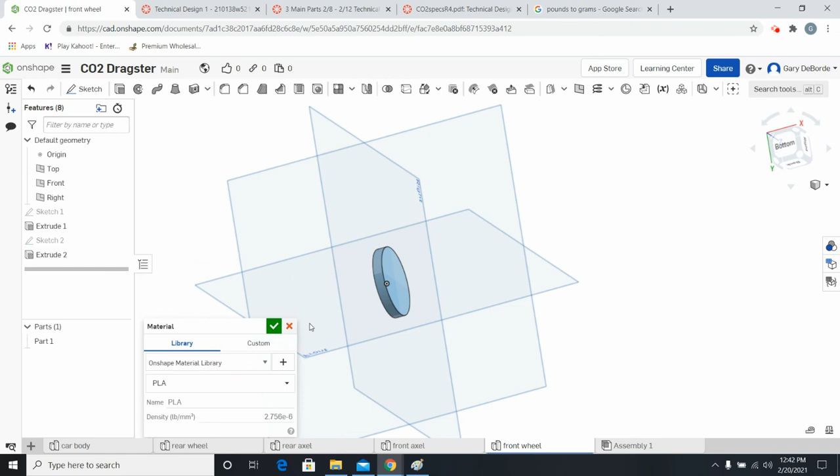So I'll jump over here and I'm just going to go ahead and check my front wheel. And I have to go back through the same process. I need to go over here and add assigned material to this wheel. I need to go find the PLA. Jump down here, it should be getting close. And I say okay to that. Then I'm going to click my scales, click my wheel.

It weighs 0.014. That's quick, easy. That's 0.028 for both. 0.028. And then go over here and type that in. Change this to 0.028. So that's 12.70059 grams. So I'm still within weight. I'm still doing okay. I only have about 60. So as long as my car body doesn't weigh over 110 grams, I should be in pretty good shape. I can say, hey, here's my car. But, got to double check, got to do the math, got to use those skills, apply that math and engineering.

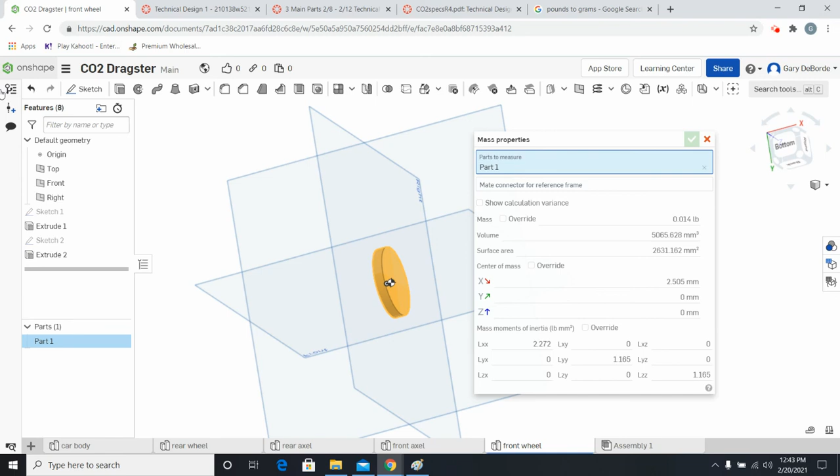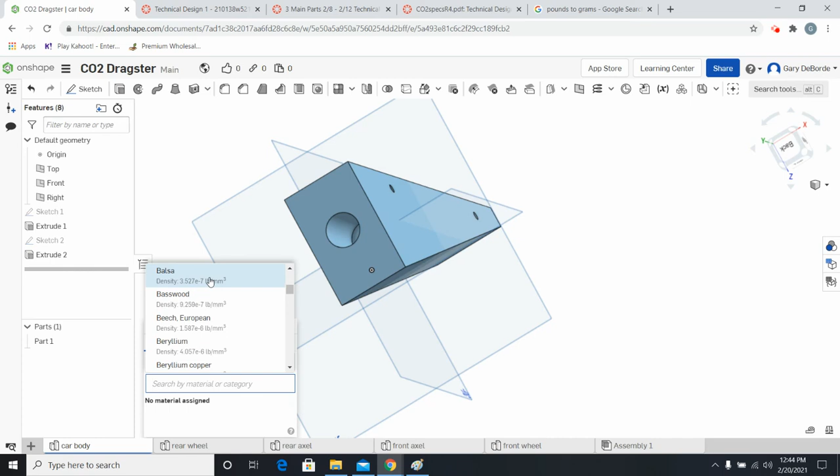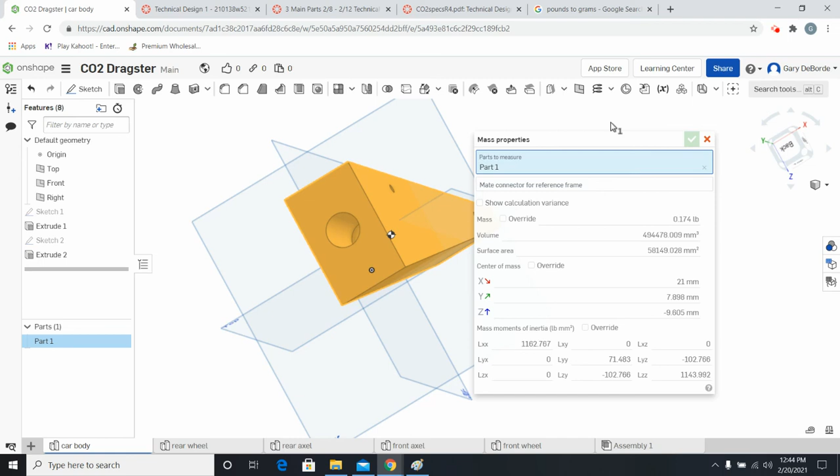So now I'm going to go ahead and look at my car body. I've already checked those things. I can go ahead and close that. I need to assign material to my car body. And I said forever, and 5 million times after, it is balsa wood. And here we go. There's the density of balsa wood. I'm going to say okay, now my car body is balsa. I'm going to click on this, select the object. It weighs 0.174 pounds. Okay, so at 0.174 pounds, we're going to find out real soon. 0.174, it weighs 78.92507 grams.

All right, so now if I add up all those things, I pop in my calculator and I'm going to put in 48.08079 plus 12.70059 plus 78.92507, 139.7 grams. Now, I know as well as you know that with this, I'm good. I'm 30 grams underneath the total maximum. And I know that being 30 grams underneath the maximum, the two axles are not going to weigh 30 grams. That would be a lot.

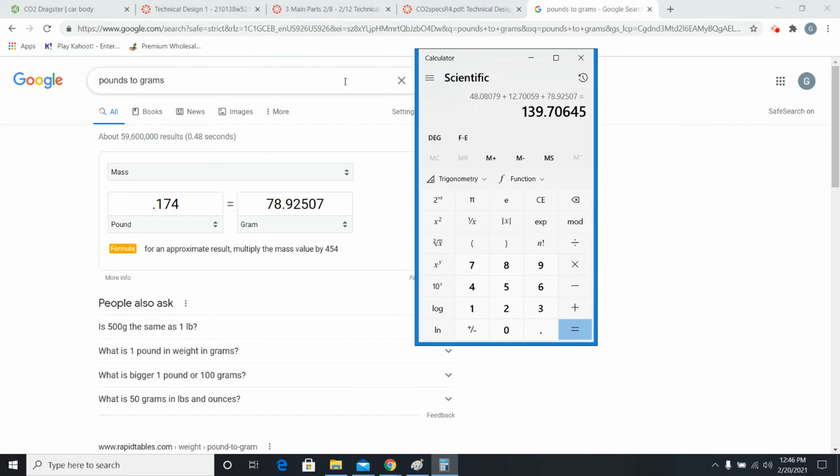They'll be heavy, but the way this whole thing was always set up was for a no fail. That's why they have that 170 gram max on there. They knew if all they did was build the car to the specs with the worst design possible, and that's what I gave you. I gave you the bare minimum that would fall within getting an A for completing this dragster. So I hope that helps you. If you got to here and you have all these parts exactly the way I drew it, then you got an A on this assignment.

On the other hand, if you want to consider, hey, the lighter the better, and that is very true, then play with it. Round some edges, cut some pieces off, make your wheels cooler, do something for you. But this, ladies and gentlemen, is all that was ever required from this assignment. I will add, only because I've been looking at people's work that's already come in: if you don't have these tabs across the bottom all named, if you don't have your document to where I can edit it when you share, if you have not done this math, then you are not getting the A. But this is what was required for you to pass this assignment.